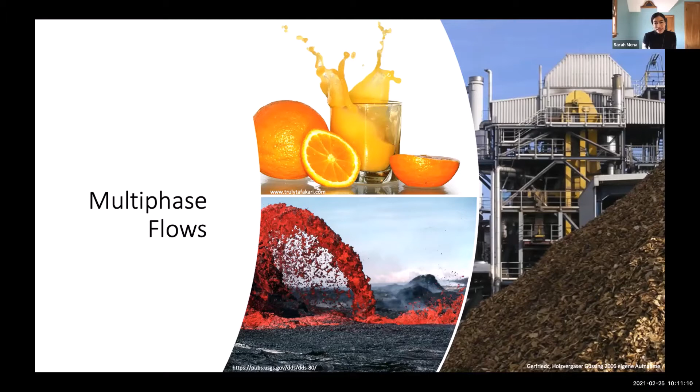Multi-phase flows refer to any combination of liquid, gases, or solids flowing together. Examples in nature include the flow of lava in volcanic eruptions, which is a liquid in a gas, and in staples of our daily lives, for example orange juice with pulp, which is a case of a solid in a liquid. In industry, the processing of biomass, either dry or wet, presents a solid flowing in either a gas or a liquid.

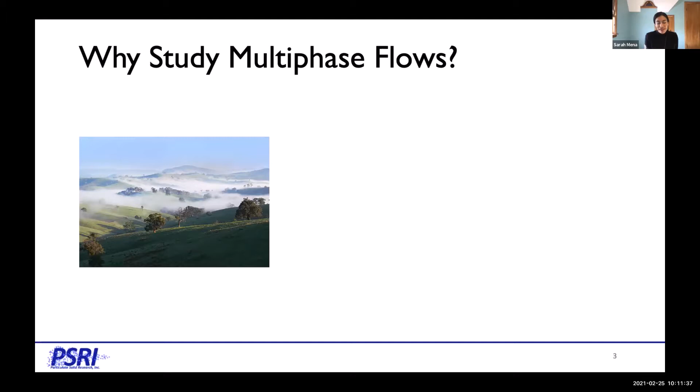We can wonder, why should we study multi-phase flows? I'll give you three examples. In nature, the study of mist in the atmosphere, a liquid in a gas, is of interest for climatologists to describe general circulation models and make weather predictions, so that we know when to stay home in a snowstorm in the Midwest, or when to evacuate for a hurricane.

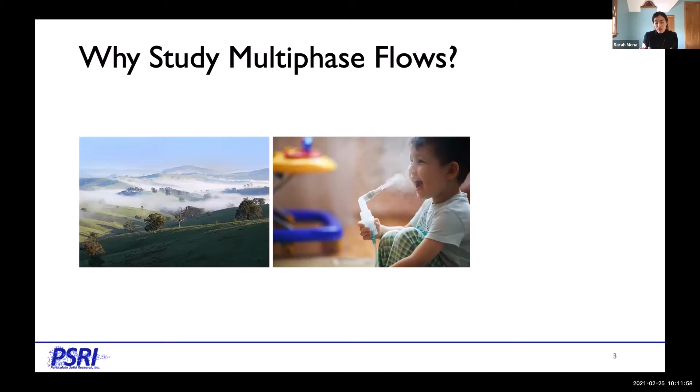In medical applications for aerosol therapy, another liquid in a gas, physicians are interested in knowing precisely the flow rate and droplet size to deliver the optimal amount of drugs into the lungs. And in industry, for example, the pressure drop developed in a two-phase flow as a function of the Reynolds number dictates the size of the pumps we need for transport.

These are just examples in a vast number of applications. Basically, whenever we have heat, mass, or reaction processes happening in a fluid in motion, we need to know the fluid mechanics because these processes are coupled.

We can ask ourselves, how different are multi-phase flows from single phase? It turns out that the presence of the secondary phase can have tremendous implications on the behavior of the flow, ranging from modifications to the mass and heat transfer coefficients, augmentation or reduction of turbulence in a process called turbulence modulation, and also changes in rheology. I think Paul is going to touch on that in his talk.

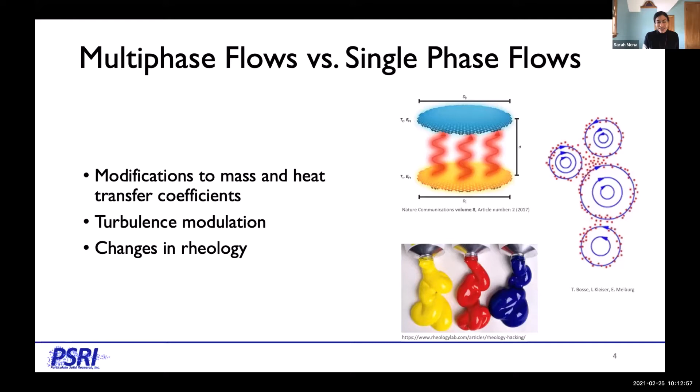Now that I've shown you why it's important to study these flows, I'd like to show you the work I did for my PhD in two configurations: one in liquid solid turbulent flows, and the other in liquid fluidized beds.

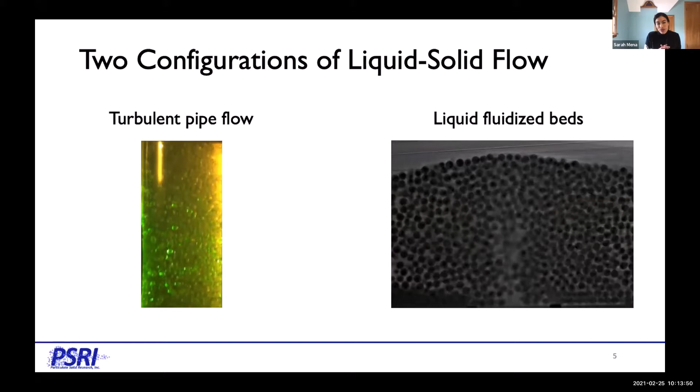That research I did in Gainesville at the University of Florida. The liquid fluidization work was done at Irstea Laboratories in France, in the laboratory of Professor Pierre Philippe, thanks to the NSF PIRE funding.

So let's begin with the turbulent flow. Turbulent two-phase flows are present in many industrial applications, ranging from transport of petrochemicals, minerals and ores, biofuels processing, wastewater treatment, just to mention some.

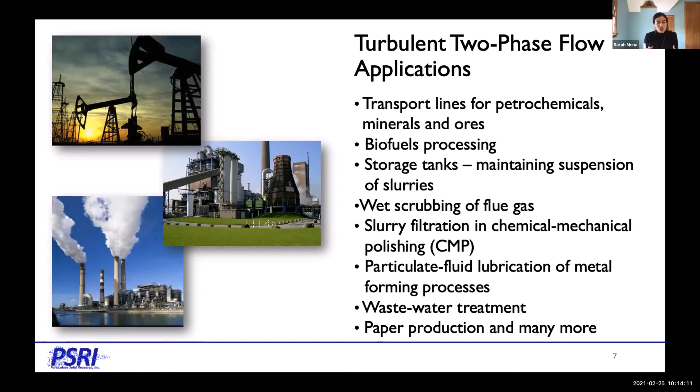Although they are so widespread, there's still a lot we don't know about them. That's important because a better understanding can help in many aspects. One of these is knowing when particles are going to settle, which can reduce problems with blocked lines that represent money and time expenses in industry due to shutdowns and repairs.

Knowing more about the flows can help in the design of new equipment, and better simulation tools can help establish optimum operating conditions for current and future lines by maximizing solids loadings.

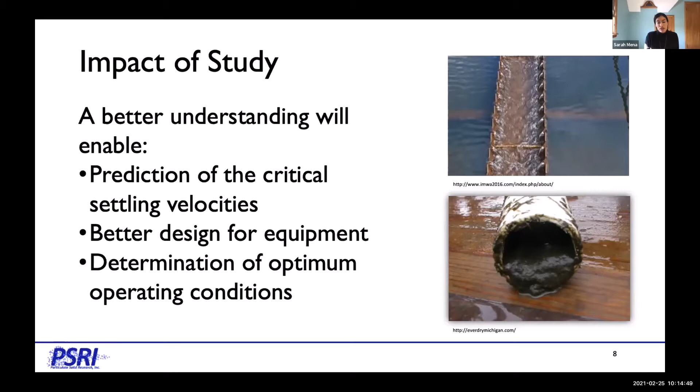In fact, according to a study by the Electric Power Research Institute, an increase in pump efficiency can save thousands of kilowatt hours and dollars in water treatment plants dealing with 100 million gallons per day. So that's a lot of money.

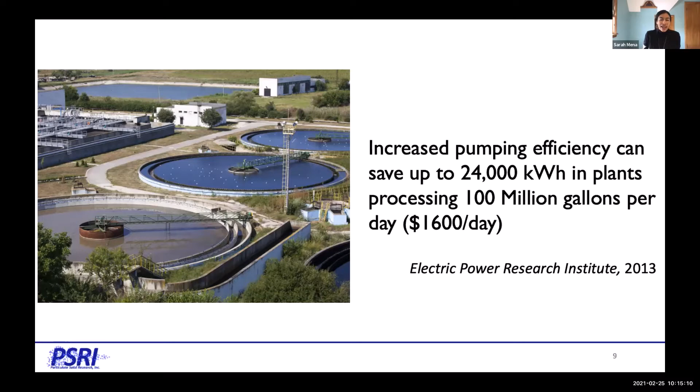The Stokes number tells us how the particle is responding to the fluid. At very low Stokes number, the momentum of the fluid dominates, and the particles follow the fluctuations of the fluid precisely. This is the viscous dominated regime, and it will most likely be the case of flows with small particles or very viscous fluids.

On the other extreme, at high Stokes numbers, the particle momentum dominates and the particles do not follow the fluctuations of the fluid. This is the inertia-dominated regime, and this will most likely be the case for flows of large particles or very low viscous fluids.

In the middle, we have an intermediate regime where the particle kind of feels the fluctuations but does not follow precisely. Now that we know what the Stokes number is telling us, let's take a look at these available data sets.

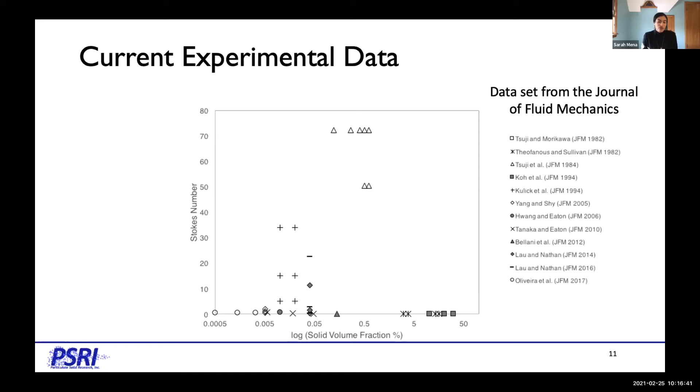I want to point out this region where there is no data, especially above 0.5% volume. Industries routinely operate at concentrations above 10%, so there is this large region where we need more information. This lack of data has been identified as a roadblock for the progress of models, and obtaining data in this region was the objective of this study.

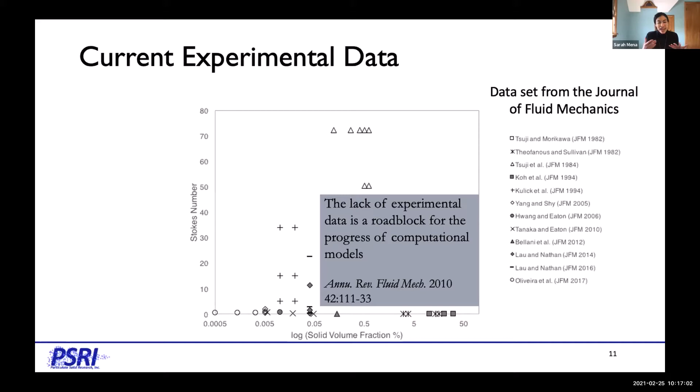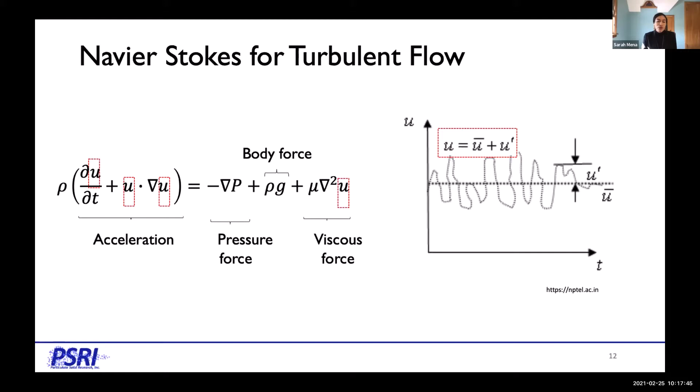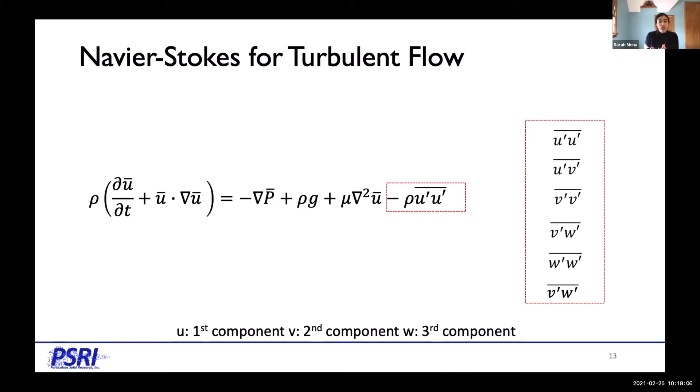After, I would say, 3 pages of derivation and manipulating these equations, what we come up with is an expression that is very similar, with the mean velocity in place of where the original velocity was. They are very similar, but they're not the same, because now we have the fluctuating components, the Reynolds stresses, the evildoers, and they include the correlation and cross-correlation terms, because in turbulence we have 3 velocity components.

To make things a little more complicated, we have a secondary phase. So we write the Navier-Stokes for the liquid and a Navier-Stokes-like equation for the solids. Here we have the presence of the solid stress tensor and the solid's pressure, which are both a function of the fluctuating components in the solids. We also have the appearance of these interaction terms because, of course, these phases are talking to each other. So this is the data that I need to characterize multi-phase turbulent flows.

I need pressures, velocities, both mean and fluctuating for each of the components, and I need information on the concentration.

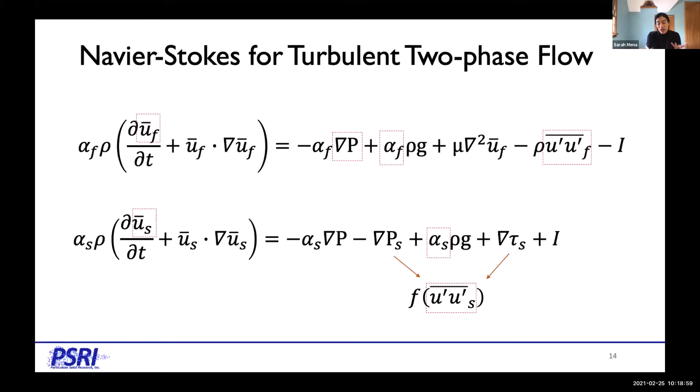To obtain this data, I use a pilot scale facility at the University of Florida that could flow rates up to 500 gallons per minute. The main characteristic of this setup is that it allowed me to change conditions so that I could have a systematic study of slurry flows. I'll explain briefly how the system operates, how the experimental technique that I use operates, and then I'll show you some results.

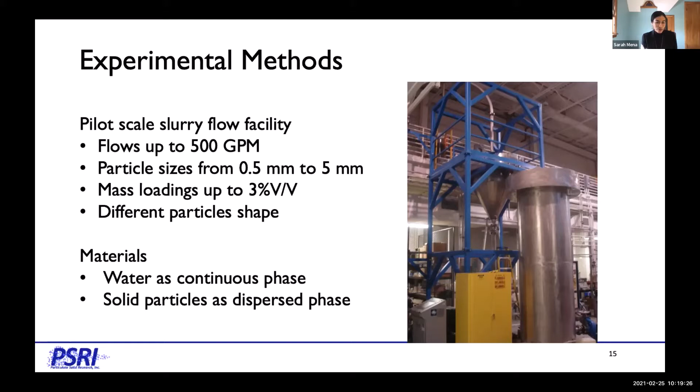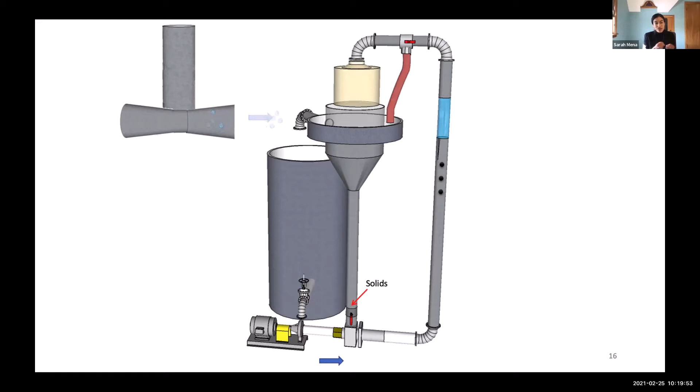The system operates by pumping water from the water tank using a centrifugal pump. The solids are in this vertical pipe, at the bottom of which I have a venturi, which is a small reduction and expansion in the area. When the flow passes through the venturi, the velocity increases, the pressure decreases, and basically I suck the particles into the flow. This mixture of solids and liquids is allowed to equilibrate over 51 pipe diameters before reaching the test section, which is where I collect the velocity profiles.

The fact that my test section is located here is important because I wanted to measure steady state properties of the flow. Note that the test section is vertical, and for that it is symmetric, which makes it easier to make model comparisons.

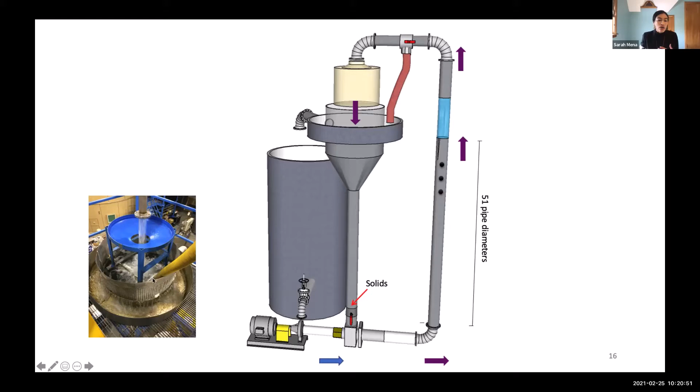After I collect my velocity information... oops, I went the other direction, sorry. I need to separate my solids from the liquids, for the sake of the pump, and I do that by gravity. The particles that I'm using are at least 3 times heavier than water, so when they reach the separation units, they drop down into the vertical section again, and water overflows through the mesh area that I have on top.

Now, to measure the velocity profiles, I use laser Doppler velocimetry, which is a non-intrusive technique that uses light to measure the velocity of a particle. Many times in experimentation, we introduce a probe into the flow, which might disturb the flow and cause us to measure something other than just the flow itself. That is not the case with laser Doppler, because the only thing that is going to be passing through the flow is light.

The technique combines two laser beams into a specific region in space, creating a measuring volume. This measuring volume has the shape of an American football, and when a particle passes through it, it scatters light that has a different frequency than the original beam.

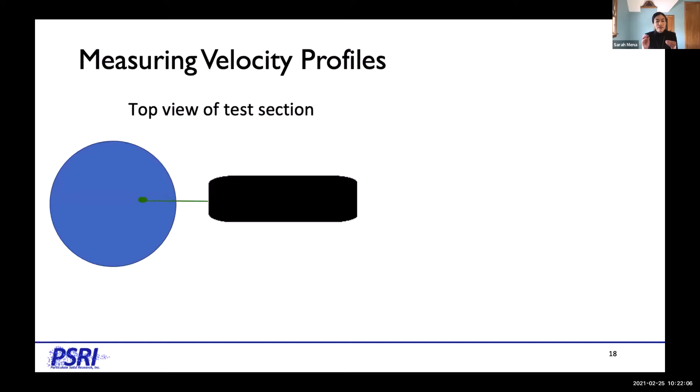This change in frequency is directly related to the velocity of the particle that scattered the light. By traversing this measuring volume along the test section, I can measure the velocities and obtain the velocity profiles that I am interested in.

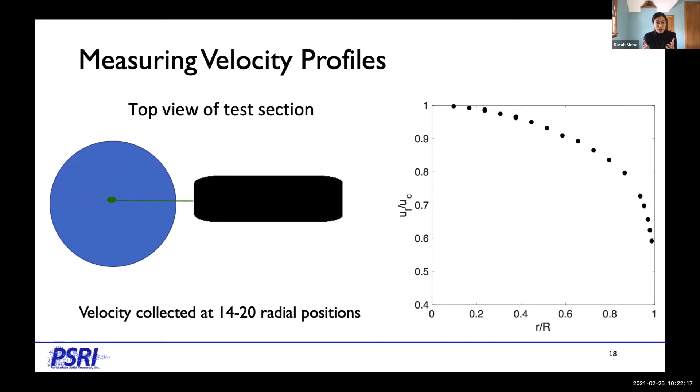Since the flow is symmetric, the other half of the profile is a mirror image. I tested many different conditions, always using water as my fluid and glass or steel particles as my dispersed phase. Particle sizes range from 0.5 to 5 millimeters and concentrations up to 2%. I changed at different Reynolds numbers, always in the turbulent regime.

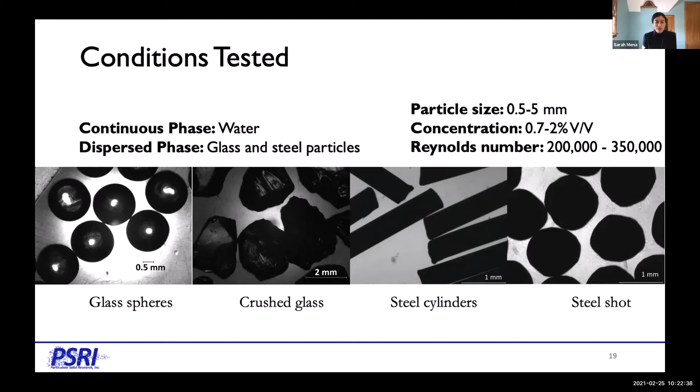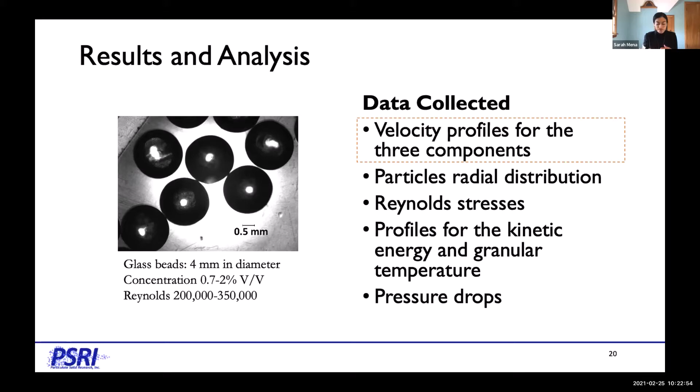Today, I want to show you the experiments for the 4 millimeter particles, and I'm going to show you how the velocity profiles in the axial direction change with concentration and with Reynolds numbers. So let me walk you through these results.

These are mean velocity profiles. 0 is at the center of the pipe and 1 is at the wall. I am presenting the single phase data at the same Reynolds number in dashed line for comparison in all of these plots. The liquid profile is here to the left-hand side and the solid profile is to the right.

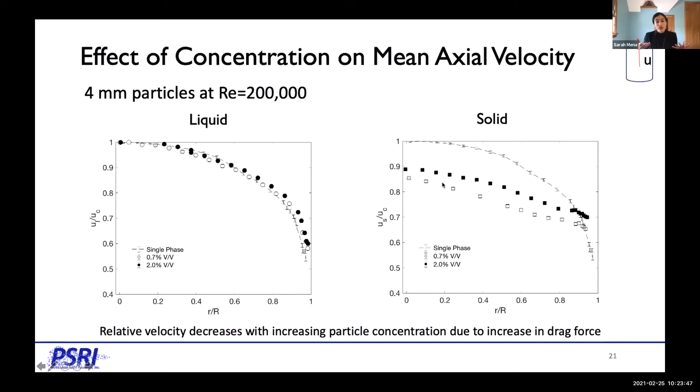Looking at the liquid profile, we can see that in the presence of the particles, the liquid flattens, the profile of the liquid is a little more flattened than in the single phase. Now for the solid, we can see that the relative velocity is decreasing with increasing particle concentration. This is due to an increase in the drag force that propels the particle motion in the streamwise direction.

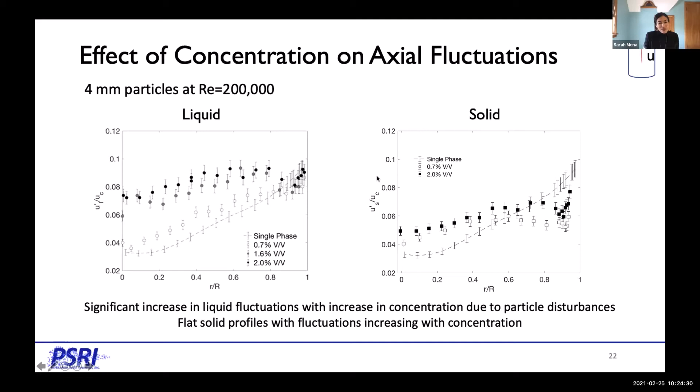Now let's take a look at the axial fluctuations. Again, liquid to the left, solid to the right. Notice how for the liquid fluctuations, there is a significant increase in fluctuations with increasing concentration. An increase in the number of particles increases the disturbances in the fluid due to an increase in particle collisions and particle rotation. And this increase in the fluid fluctuations in turn enhances the solid fluctuations, which we can also see are increasing with concentration. And we can ask, well, what happens at a different Reynolds number?

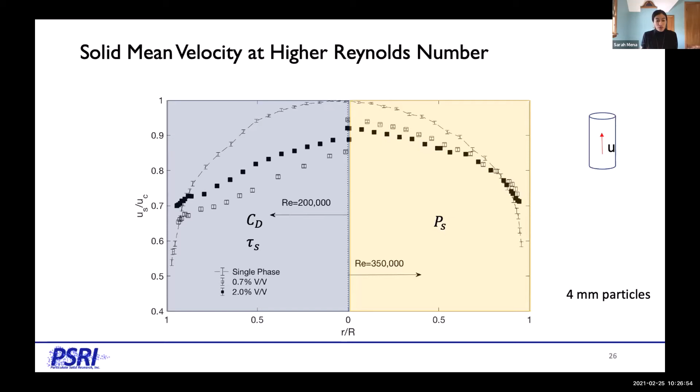So my objective while walking you through this analysis is to show you that different conditions make terms pull in different directions, so some mechanisms might dominate over others. And that is how I would like to summarize this first project.

I showed you a gap in knowledge, and you can see that the data that I collected, in dark circles, started to close this gap. Analyzing this data allows us to start seeing the competing mechanisms and how important data is at the specific conditions, because what dominates at certain velocity might not at a different one, although we are in the turbulent regime.

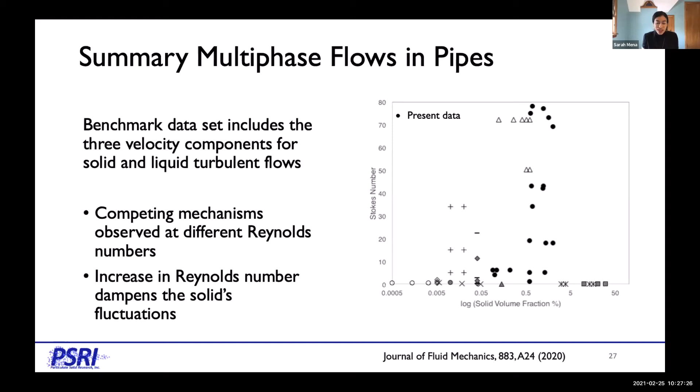Let's change gears now, and let me tell you about my work in fluidization.

For this project, we were interested in studying localized fluidization, which is the situation where the injection into the bed is at a point, not distributed like in the general fluidization configuration. This makes fluidization occur only in a region of the bed.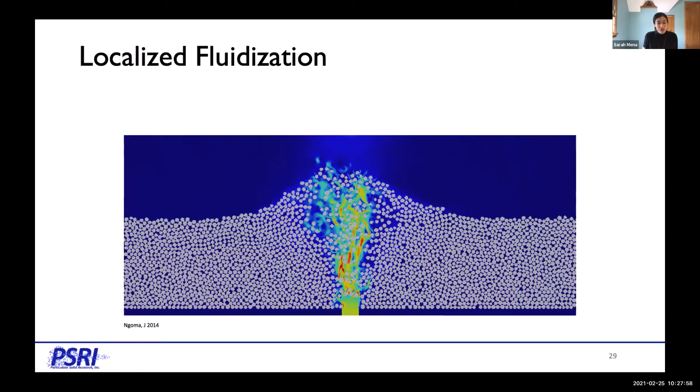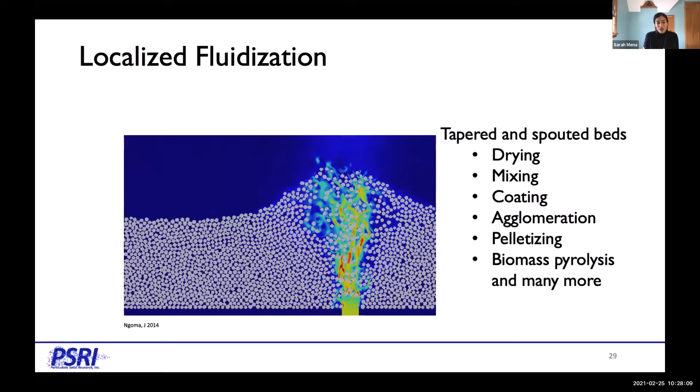This type of localized flow has applications in the chemical industry, in tapered and spouted beds used for drying, mixing, coating, and many other applications. It also has applications in the maintenance of navigable waterways and sand bypassing operations.

Localized fluidization is the cause of the formation of sand boils from underground seepage. This can be an indication of where dams are going to fail, and can also be a problem in chemical industries, as witnessed in a chemical accident in Sweden in 2005, where an underground pipe leaked water and caused soil destabilization that made a sulfuric acid tank collapse.

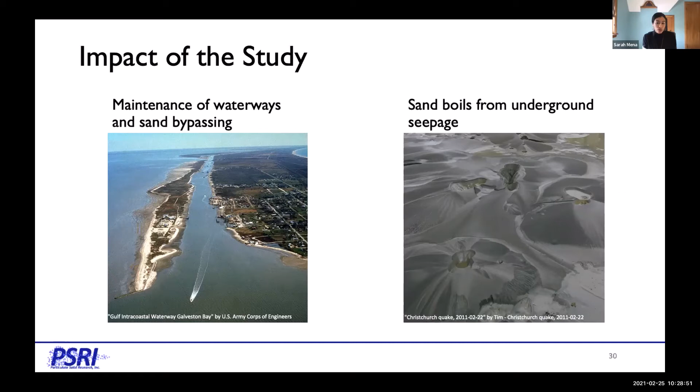Studies on localized fluidization are usually done in shallow beds, which might suffer from wall effects. Another method to study these flows is using direct probing, which may alter the measurements, as we discussed in previous projects. A less intrusive method is to observe the surface of the bed.

Like in this paper in Physical Review, we note when fluidization has occurred just at the surface, without introducing a probe. With this method, we don't get any information about how the fluidization was formed. And that is the intersection of what we would like to study in this project.

We wanted to study localized fluidization away from walls, finding out what happens in fluidization and defluidization sequences, what is the critical flow rate to achieve fluidization, and how the fluidization is formed. Embedded in all of these points is what is the influence of parameters like the diameter of the injection port, the bed height, the particle roughness, and the particle diameter.

Today I will focus on just a small portion of this study about the initial stages of fluidization.

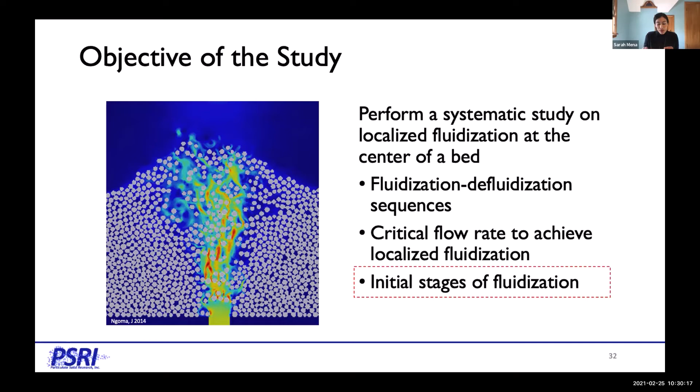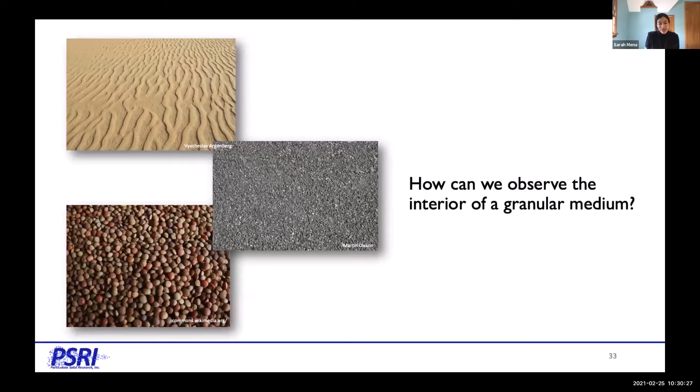We can ask ourselves, how can we observe the interior of a granular bed? I joke that I use magic, but it's really the magic of science. I use a solid that has the same refractive index as the liquid to create a transparent medium.

The beaker in this picture is full of particles. But as I introduce the beaker into the liquid, you can see that it becomes transparent. You can see my fingers behind the beaker, and the writing on the beaker. But the particles that are not immersed in the fluid are not transparent.

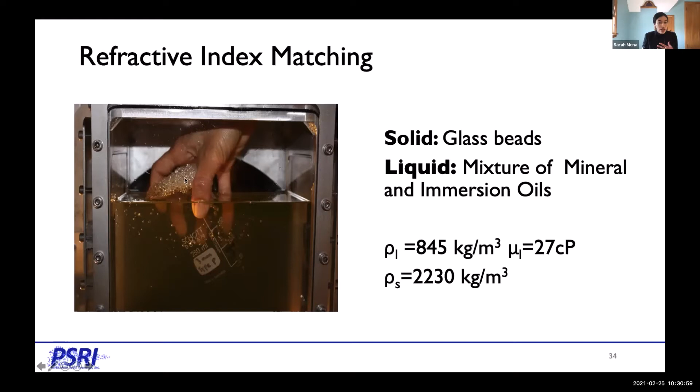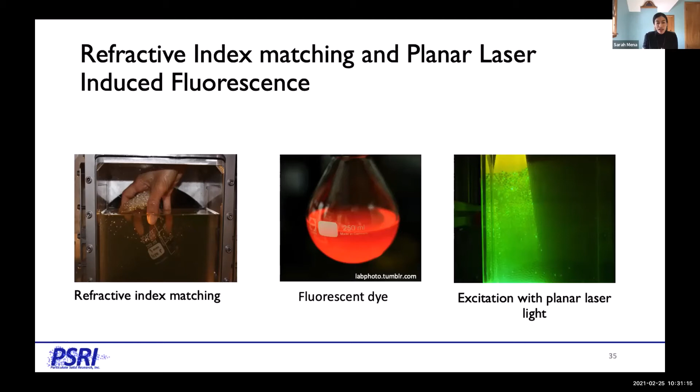With this transparent medium, I add a small amount of fluorescent dye into the liquid, and I excite the plane of interest with laser light. The resulting picture has dark regions for the solids because they do not have the dye, and bright regions for the liquid because they have the dye.

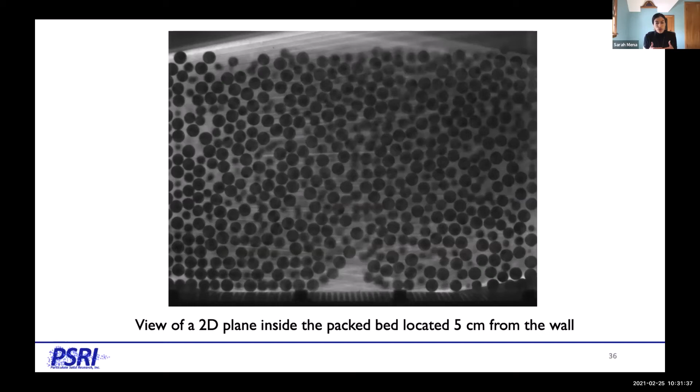This picture was taken at the center of the bed. There are about 5 centimeters of particles, about 2 inches, in front of and behind the plane that I'm showing.

We place this mixture into our test bed, which is a Plexiglas box that has a constant level overflow. Today I will show you only the results for the 3 millimeter particles at 125 millimeters bed height, and I varied the injection port diameter into the bed as I tested different flow rates.

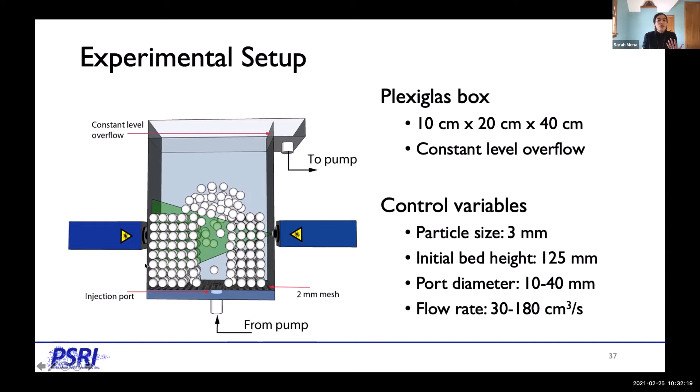For these experiments studying the formation of fluidization, I would start at a certain flow rate, take a video of the bed for about 5 to 6 minutes, then erase the memory of the bed and start at a higher flow rate.

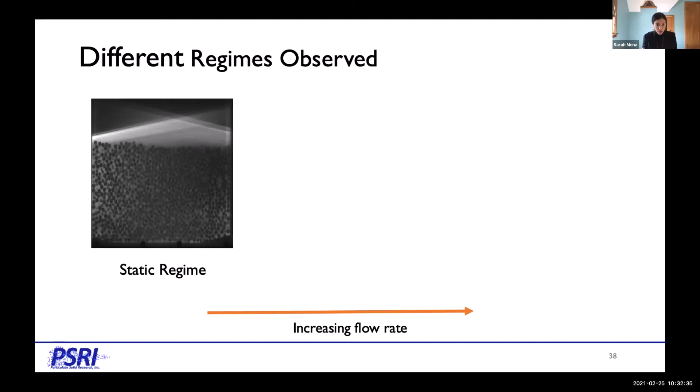What we observed was that at small flow rates, we are in the static regime. The bed behaves as a porous medium and is not deformed. If we start at a higher flow rate, a region of the bed gets fluidized but does not reach the top — we call this the fluidized cavity regime. At even higher flow rates, a full localized fluidization is formed.

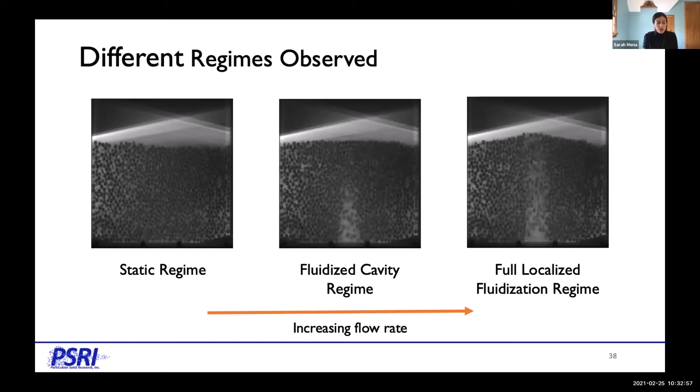Let me introduce two variables that I will use to characterize this bed. The first is the cavity height, HF, which is the height of the moving region measured from the bottom of the bed. The second is the expansion time, T naught, which is the time it takes for the cavity to grow from the bottom all the way to the top.

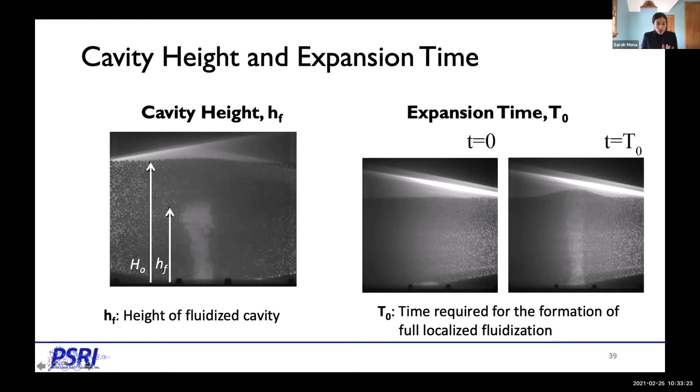If we look at the expansion time, which is only defined for the full fluidization regime, as a function of the flow rate, what we observe is that as the flow rate grows higher, the expansion time grows smaller.

As we would expect, this fluidized zone moves faster at a higher flow rate. Let me add the regions in the flow rate where we observe the other two regimes: blue for the static regime and light blue for the fluidized cavity.

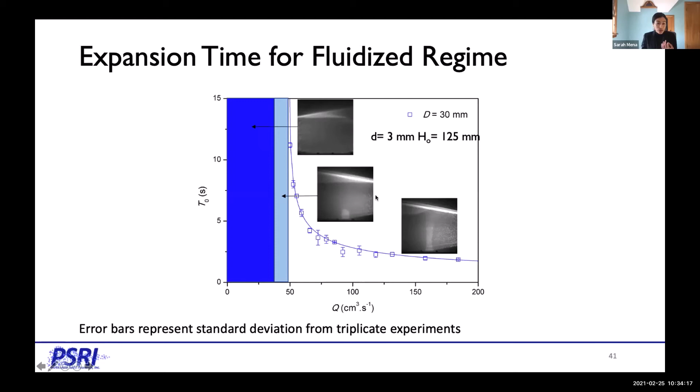Now, these three regimes have been observed in previous studies. Each of these experiments lasted between 5 to 6 or 7 minutes, and what I noticed during that time is that sometimes this cavity would grow. So we decided to wait longer.

What we found is this new plot to the right. I have kept the original demarcations in the flow rate, and note how everything that I had previously defined as a cavity regime actually grew into a full fluidization, just at a longer time, as you can see now this scale being logarithmic and not linear.

So we found that the cavity regime is an apparent threshold. The cavity grows slowly, painfully slowly if you want, to graduate into a full fluidization.

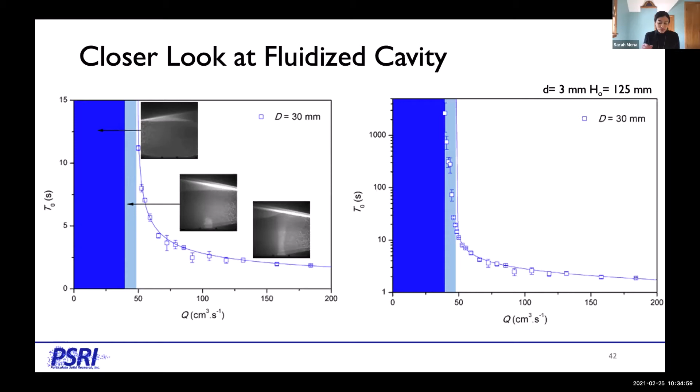In light of these new results, we wanted to understand how a fluidized cavity forms in the white versus the blue regions. For that, let's pick a flow rate in each of these regions.

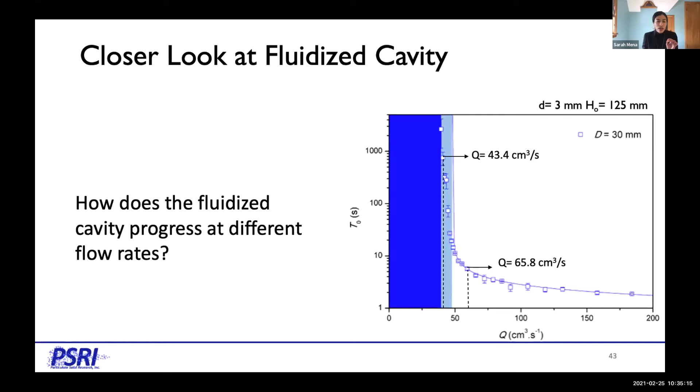If we observe the cavity height, HF, at the higher flow rate, we see that it's an almost uniform expansion. But at the slower flow rate, we have a very slow initial expansion with a very rapid final expansion at the end.

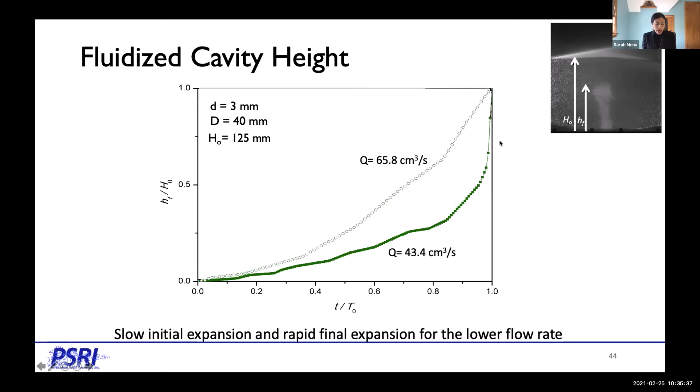If we observe the rate of expansion, which is the derivative of the graph I just showed, we found that the rate of expansion for the lower flow rate is nearly 3 orders of magnitude lower during nearly the entire fluidization process, except again at the very, very end.

One additional distinction for the fluidization in these two regions appears while observing the standard deviation of the expansion time. Here I'm plotting the standard deviation as a function of the flow rate, and notice how the higher flow rates are a lot more reproducible than the expansion time in the smaller flow rates.

In view of these different kinetics, we can differentiate between the previously observed regular regime expansion and a new ultra slow regime. The last result I want to show you is what happens when we change injection port diameters in these two different growing regime regions.

What we notice is, again, I'm plotting here the expansion time as a function of the flow rate, with different injection port diameters from 10 to 40. This dashed line is more or less our demarcation between this regular regime and the ultra slow regime.

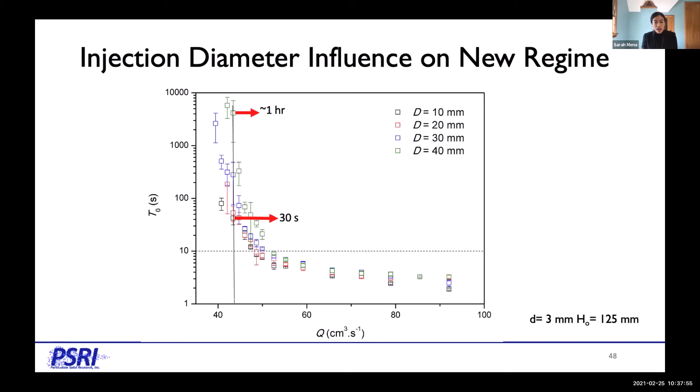So to summarize this section, we discovered a new regime where the injection port diameter has an influence on the time it takes for localized fluidization to progress into a full fluidization.

So thinking back to one of the problems I started with, the soil destabilization from a leaking pipe, these findings show that even a small leak can grow a sand boil that can cause problems, and that a smaller leak might actually cause the sand boil to grow even faster if subjected to the same flow rate.

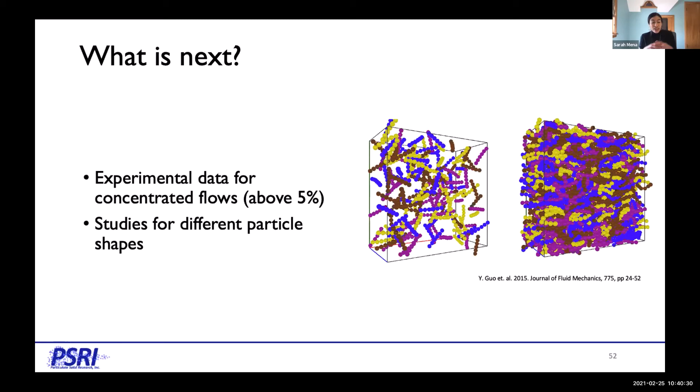Conditions matter, and that is why it's important. That is one of our mottos at my job at PSRI. We are a research and consulting company in particle technology, and we have a wide range of equipment and tools, both experimental and numerical, to study the flow of granular materials at the conditions of interest, and at those conditions, guide the design of equipment. So I get to continue my quest to understand the very interesting world of particle technology.

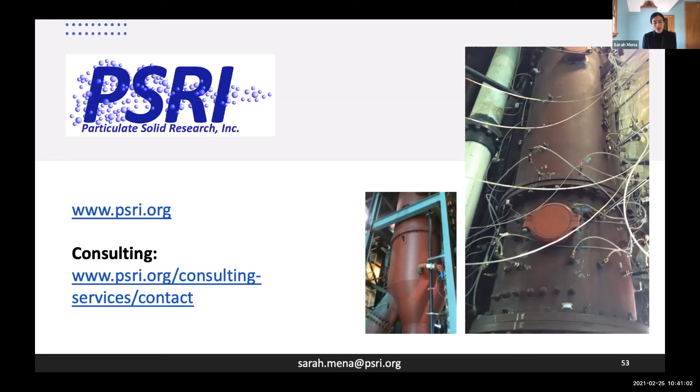With that, I would like to thank you for your attention and open up for any questions that you might have.

Outstanding talk, Sarah. Thank you so much. Thank you. So, I mean, you don't have the roar of applause like you do have an audience when you're on Zoom, right? But it would be here, no doubt. So, thank you. Are there questions from the audience?

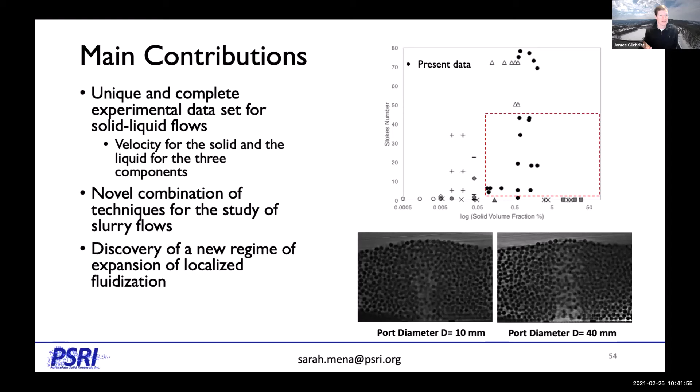I guess while people are thinking about it, I can ask one, just being selfish about it. So when you get to much higher Reynolds numbers in the first part, are you saying that the turbulence factor and amount of fluctuations of the fluid itself also decreased? I know you're tracking the particles, and you see that essentially there's dissipation, right? There are a lot of other ways to decrease turbulence in flows, by adding polymers and other things to produce dissipation. So I was wondering if that's really the mechanism here, or is it not a reduction of turbulence?

When I calculate the turbulence statistics, I actually observe an increase in turbulence for all the conditions that I tested. So we really think that in this case, as you say, there are many mechanisms that can be at play. One of the explanations I gave is that this is more related to the change in the fluctuations of the solids that we were observing. But I am also very curious to see more studies pulling each of these terms apart and comparing what we get at different conditions. I do not know if I understood your question properly.

No, I'm not sure if I understood my question properly either. So that was a good answer. Anyone from the audience have questions? Marc-Olivier, please, you can feel free to unmute.

Hello, Sarah. I want to join Jim, first of all, to really congratulate you. That was extremely engaging, so well presented. Amazing talk. Both parts of the talk are really interesting. I had one to start with about the transition you described at the end with these two regimes. Normally when I think of two regimes, I would imagine there's some type of critical condition, a critical velocity, just a critical point. Is that something you notice there? Can we really speak about two regimes? Because the curve as it is seems to be one continuous curve. I mean, it's going up very steeply at some point, but what defines really that transition?

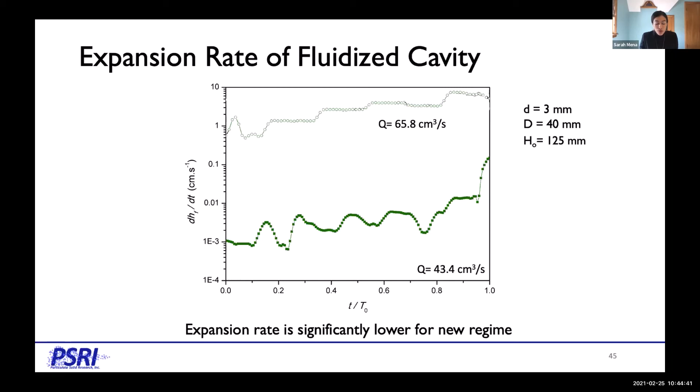Yes, so the transition, we defined it, and as you said, we had to make a decision at some point. But we checked the standard deviations, which gave us one of these methods to see what is what. We checked the expansion rate, and checked, for example, if it had at least three orders of magnitude difference, and the other one was just observing the expansion of the cavity. These three points are what allowed us to draw this line, in this case for the 3mm particles, at about 10 seconds of expansion time. That's where we made the delimitation.

But I do not think that is set in stone. That's a great point, and of course that changes depending—if we had the 5 millimeter particles, it would be at a different one. But our criteria was observing those three points: how is the expansion progressing.

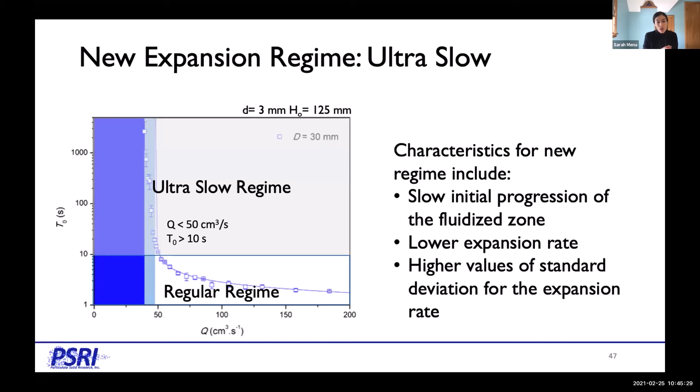How is the expansion rate? And how were the standard deviations? Because we did see that it is not as reproducible.

Because it's in terms of generalizing this for different conditions, right? And to see whether there is some type of critical parameter, or set of parameters, that can, almost like a Geldart's plot, right? It might be a zone where there's a transition, and that, of course, would be great.

I know then your PhD would take even longer, for this especially the steep parts. So yeah, maybe doing replicates on these long experiments, you know, the 1,000 seconds there.

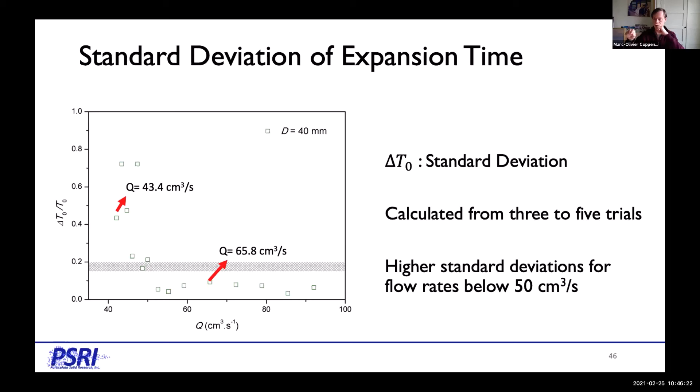If Jim allows me to ask something else, is that right? So at the beginning as well, when you said there's a compensation of two terms, you explained this really well with the Navier-Stokes equations, and you had the drag coefficient in the bottom, and then solid stresses, tau s minus ps, and so on. That's the one I meant. So what I'm wondering is what is the order of magnitude of these?

So you say indeed correctly that they tend to compensate and so forth, but in what sense? Is there a strong push going into one direction or the other? What's determining that? Yeah, that's a great point.

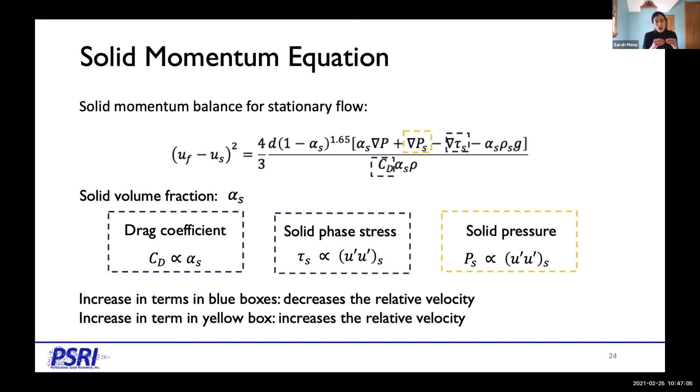Thank you, Marc-Olivier. I did some calculations when I was looking at these, with the data that I had. But it would be so great to actually see this analysis throughout many values of Reynolds number, to see where, for example, this trend is actually happening, where this switch with increasing concentration occurs, at which point in the Reynolds regime this is going to happen. I do not know the answer to that, but I think it would be a very, very interesting analysis.

And it truly shines a light on how important the interaction of these factors is, because we could think that higher Reynolds is just higher Reynolds, but the wide range of Reynolds number has subtleties that, as you are correctly pointing out, relate to the actual order of magnitude of each of these terms that makes things go in these directions.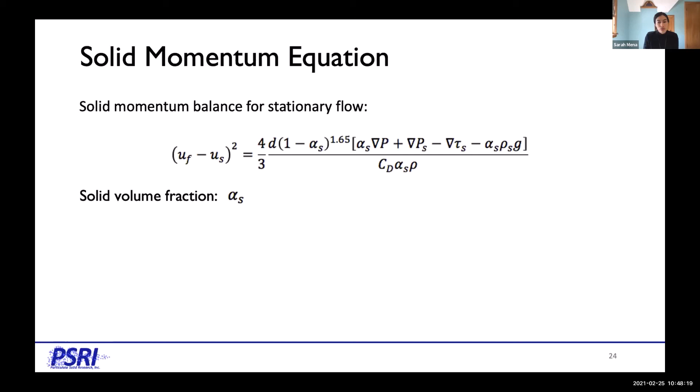So this analysis was one of the possibilities that we can explain it with. But I am also very curious to see if there are others, and how we can really explain why we observed this change in the relative velocity behavior.

Seems like there's another PhD thesis in there. Another PhD thesis, not by me though.

Thank you very much, Sarah. Congrats again. Oh, thank you, Mark Olivier. I see Rich has a question.

We'll have to probably keep things moving along, knowing time. So go ahead, Rich, quick question. Well, maybe just a quick question. Sarah, great talk, thank you.

In both of these cases, though, one of the things you didn't mention, but I'm sure you considered, was the density of the particles versus the density of the fluid, and the influence of that, which seems to me would make a difference in both situations.

Yes, so your point is that in this case, the density of the particles could be having an effect on the relative velocity, am I understanding? That's right. Yes, and of course, for a different density particle, we would expect to observe a different relative velocity. Now, would we expect to see this trend changing at the same conditions? I do not know about that.